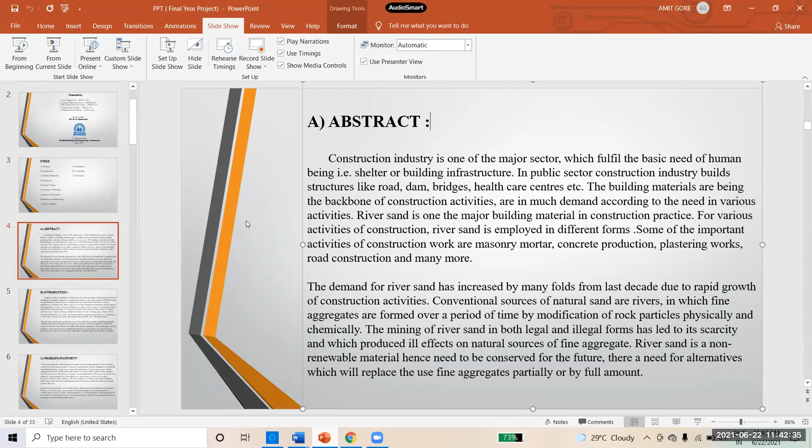Sir, where am I last?

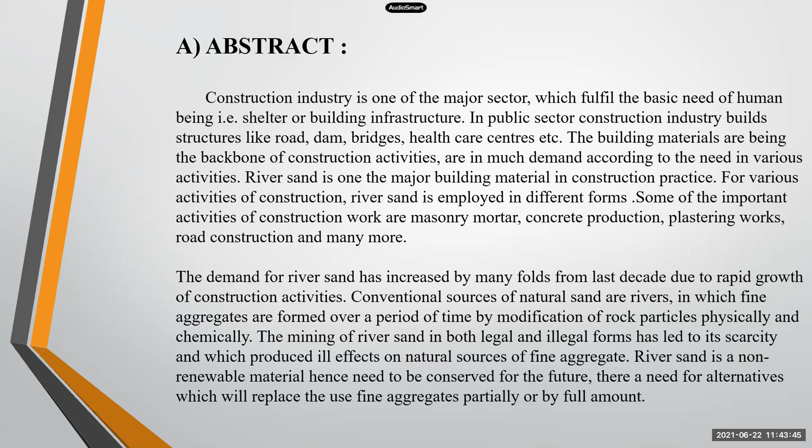Excessive in-stream sand and gravel mining causes the degradation of river. In-stream mining lowers the stream bottom, which may lead to bank erosion. The effect of mining is compounded by the effect of sea level rise. Hence, we need to have alternative options for river sand.

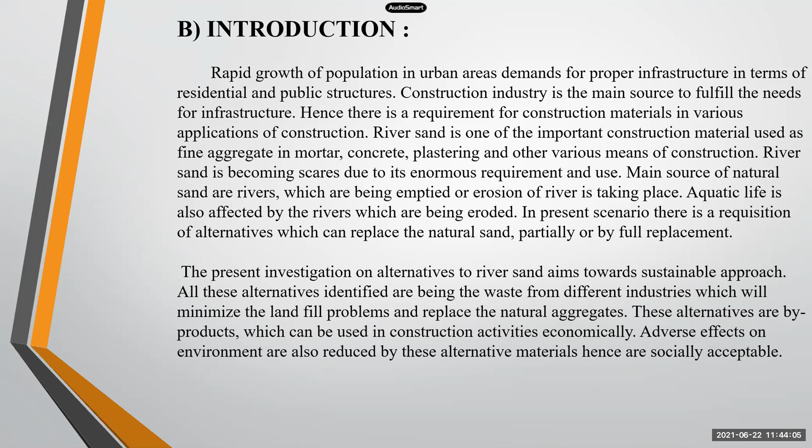Also, we have to keep in mind that alternative options should achieve high strength, gain greater workability, avoid construction defects, and reduce economy of construction.

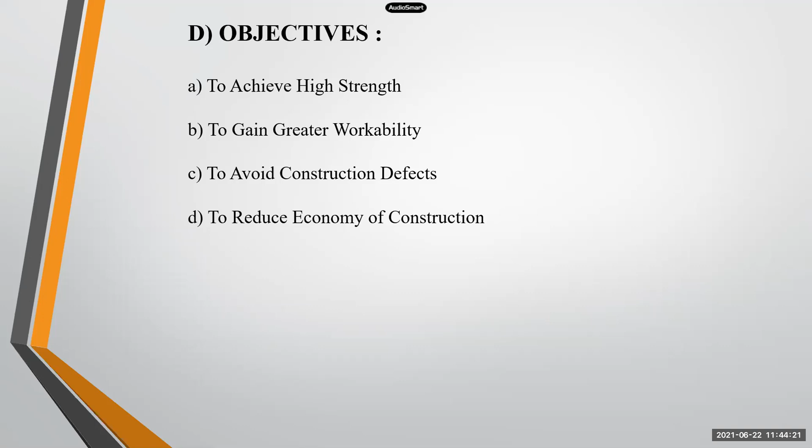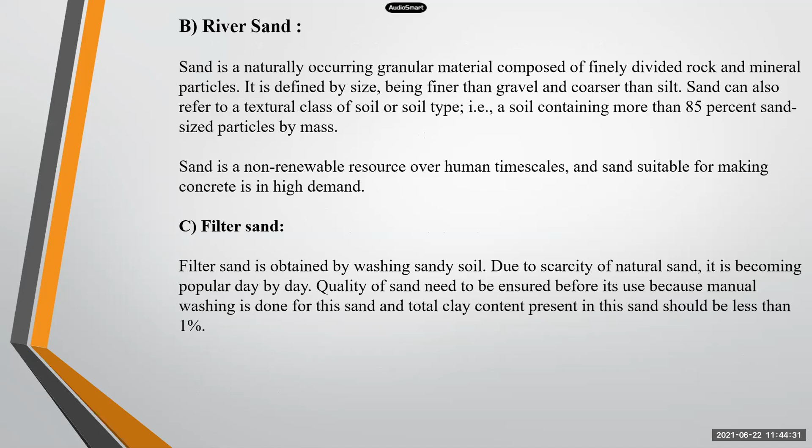There are many alternatives to the river sand like manufactured sand, filter sand, dune sand, offshore sand, and slag sand.

Also, there are some tests to know whether an alternative sand is effective or not. There are some tests like flow table test, compressive strength test, tensile strength test, flexural strength test, etc.

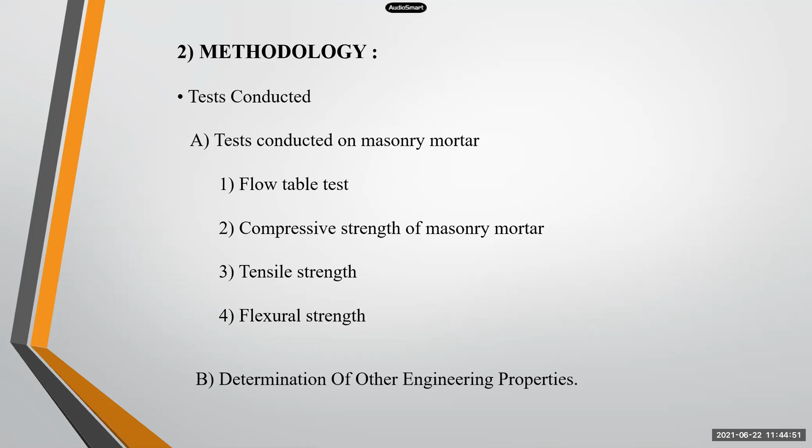The advantages of alternative sands are like it does not have the impurities such as clay, dust, silt, coatings, and increased water requirement of river sand due to impaired bond between cement paste and aggregate.

So in conclusion, based on the experimental investigation on the alternative sands, the alternative sand can achieve greater strength and properties and it can be the best replacement to river sand.

Now Satyajit Guru will continue in depth, he will explain. Yes, myself Satyajit Guru, I will explain the scope of the study.

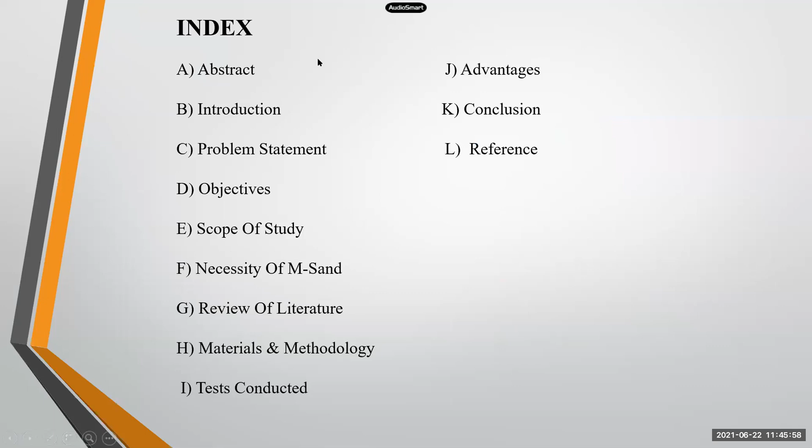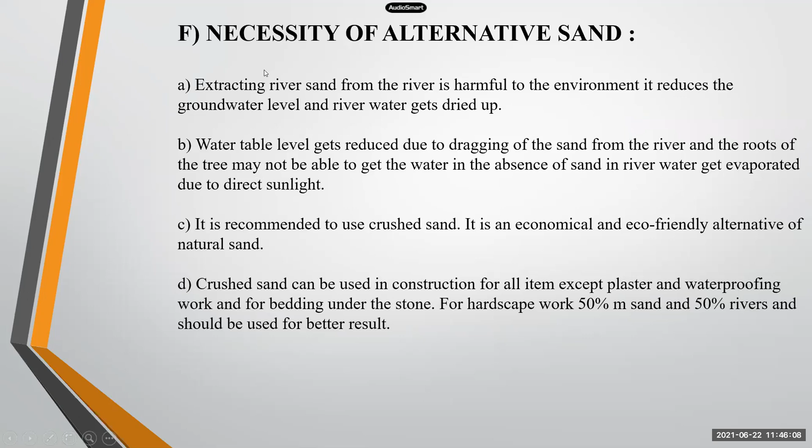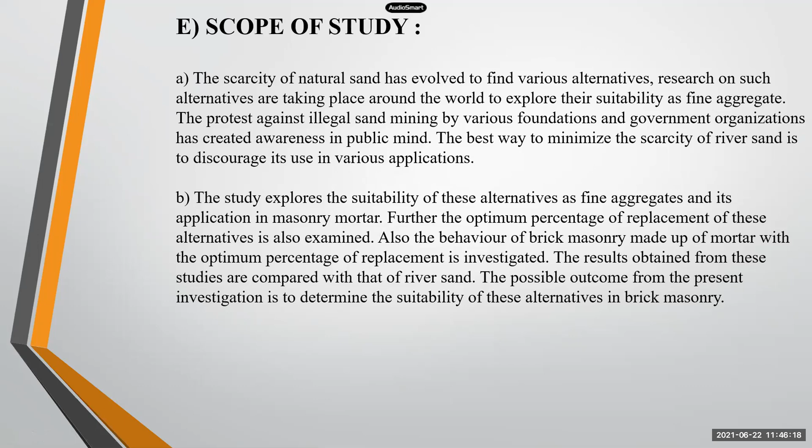Scope of the study in which we will basically focus on what is the alternate sand for river sand. First one is the scarcity of natural sand, which led to finding various alternatives. Research on these alternatives is taking place around the world to explore their suitability as fine aggregate, in protest against illegal mining.

Various foundations and government organizations have created awareness in public mind, and the best way to minimize the scarcity of river sand is to discourage its use in various applications.

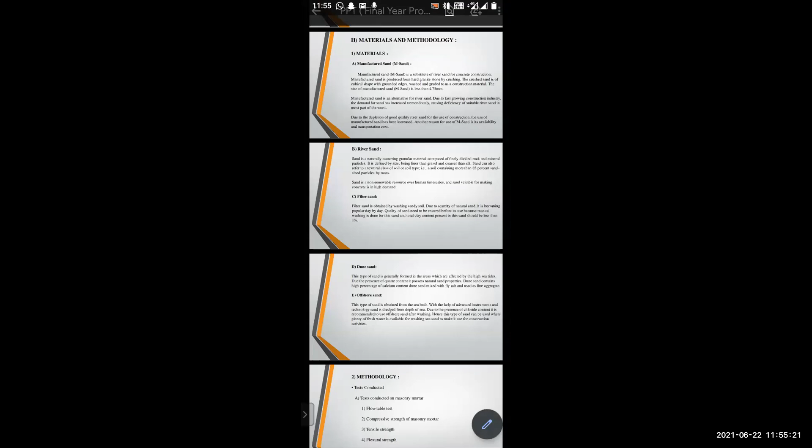River sand. This sand occurs from finely divided rock particles. It is defined as size being finer than gravel and coarser than silt. It contains more than 85% sand-size particles by mass.

Filter sand is obtained by washing sandy soil. Due to scarcity of natural sand, it is becoming popular day by day. Quality of sand needs to be ensured before use because of manual washing of sand, and total clay content present in the sand should be less than 1%.

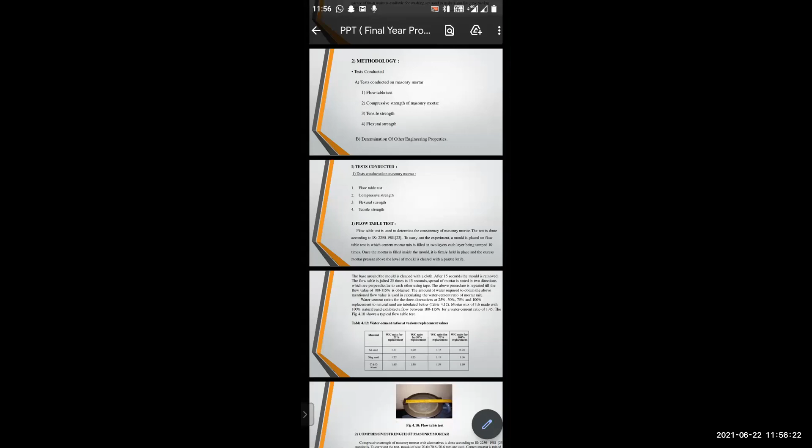Now Santosh Dole will explain the test and methodology. Good morning to all of you. I am Santosh. As per Indian standard, conduct the test on masonry mortar.

How can we conduct this test? There are 4 methods or tests. First one is a flow table test. Second one is compressive strength. Third one is flexural strength. Fourth one is tensile strength.

The first test we conducted is the flow table test. It is used to determine the consistency of masonry mortar, as per Indian standard 2250-1981. How can we conduct the test?

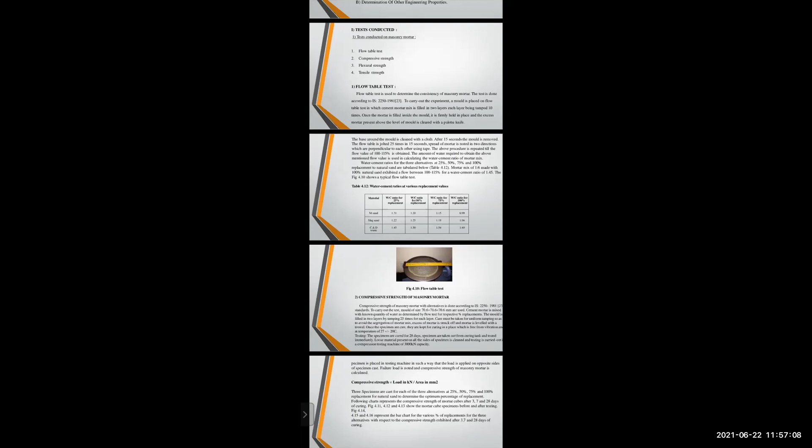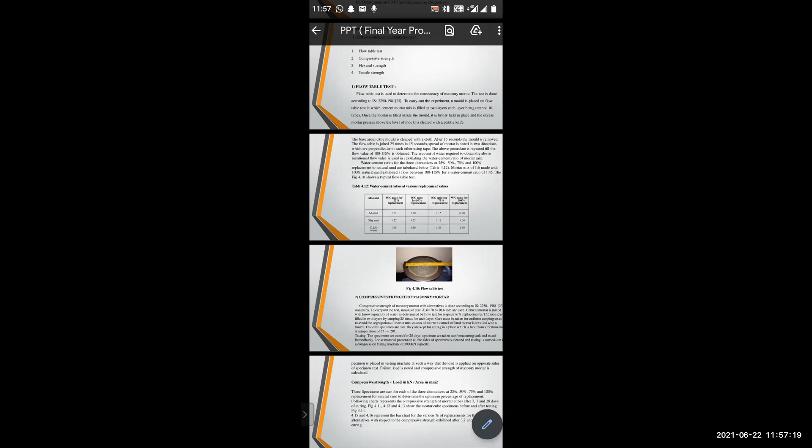The mold is first placed on a flow table, in which cement mortar is filled in 2 layers, each layer tamped 10 times. Excess mortar above the mold is cleared with a palette knife. Then, using a cloth, clean the mold. After 15 seconds, remove the mold.

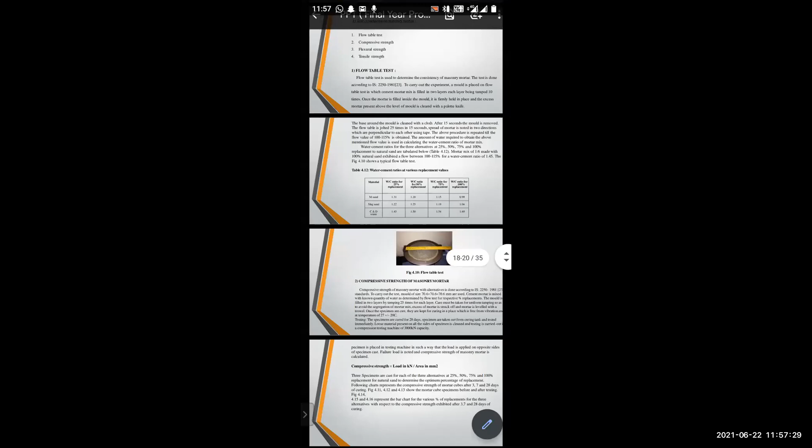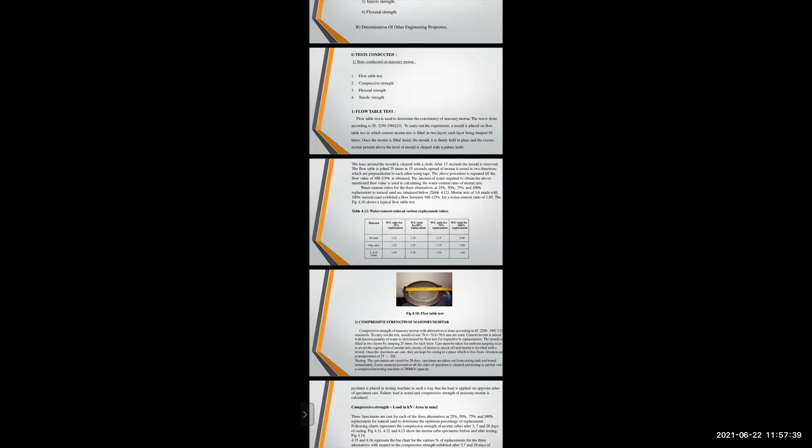The flow table is jolted 25 times in 15 seconds. Spread mortar is noted in two directions, which are perpendicular to each other. The above procedure is repeated until a flow value of 100 to 115% is obtained.

The obtained flow value is used for calculating the water cement ratio of the mortar mix. The second test is compressive strength.

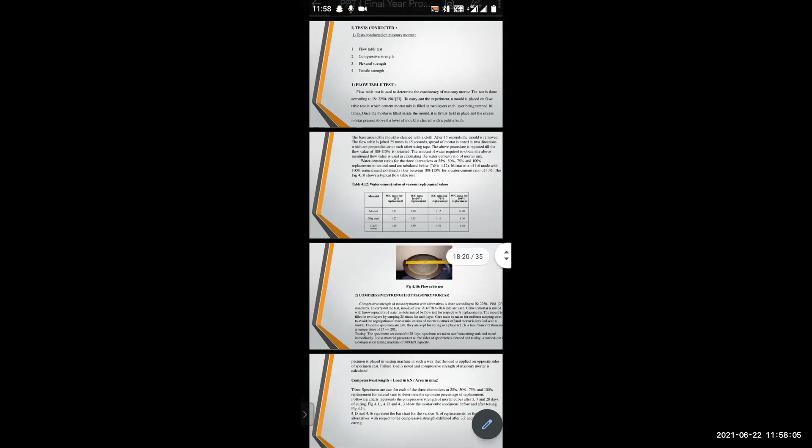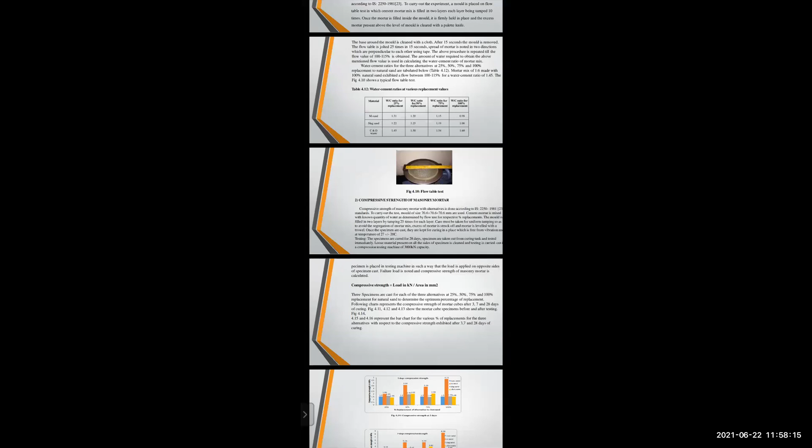As per the India Standard Code 2250-1981-23, standardly carried out, the test mold size used is 70.6 by 70.6 by 70.6 mm. Cement mortar is mixed with known quantity of water from the flow test for the respective replacement. The mold is filled in 2 layers, tamping 25 times for each layer.

Care must be taken for uniform tamping to avoid segregation of the mortar mix. After striking off, the mortar is leveled with a trowel. Once the specimen is cast, it is kept for curing in a place free from vibration, at a temperature of 27 degrees.

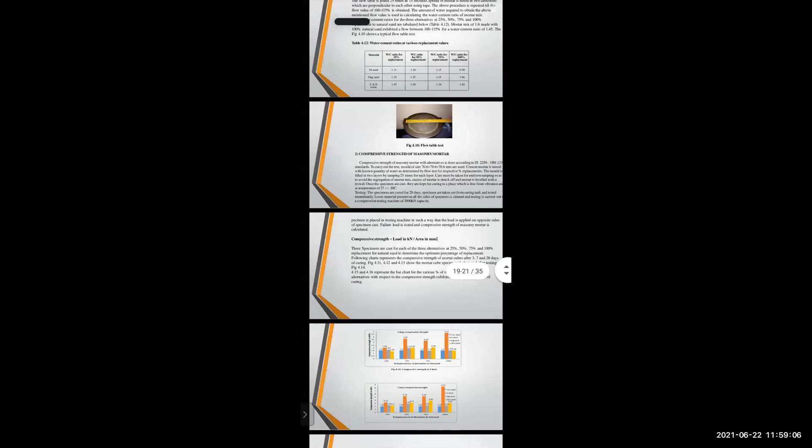The specimen is cured for 28 days, then taken out from the curing tank and tested immediately. All loose material on the sides of the specimen is removed, and the test is carried out on a compressive strength machine of 3000 kilonewton capacity.

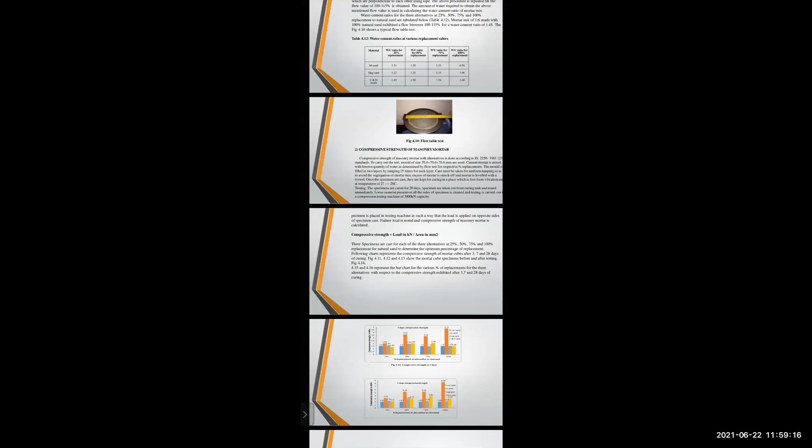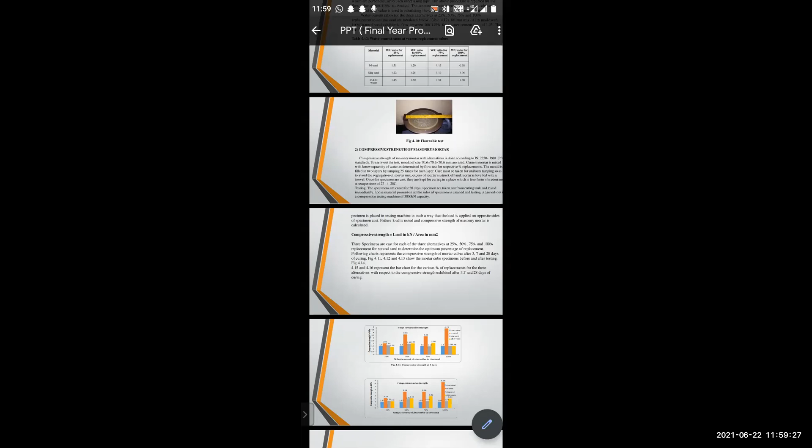The specimen is placed in the test machine such that the load is applied on the opposite side of the specimen cast. The failure load is noted, then the compressive strength of the masonry mortar is calculated, using the formula: compressive strength equals load divided by area.

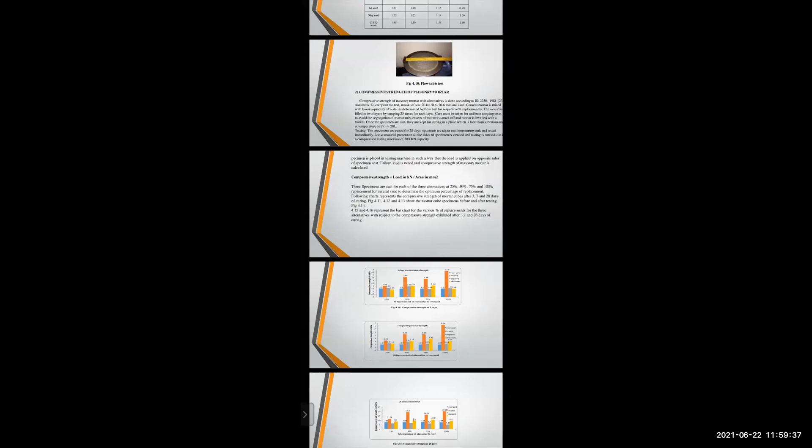After the third test, as per Indian standard, that's tensile strength. Tensile strength of a mortar made with alternative materials is determined using a briquette, as per ASTM C307-24. A lever arm test apparatus is used for loading the briquette specimen, with a lever arm ratio of 40.

Lead shot is used to balance the lever arm, which is placed inside a measuring jar. Once the briquette specimen is firmly placed, shot is released from the top, and the amount of lead shot collected in the measuring jar is weighed. Tensile strength is then calculated using the formula P into LA divided by area.

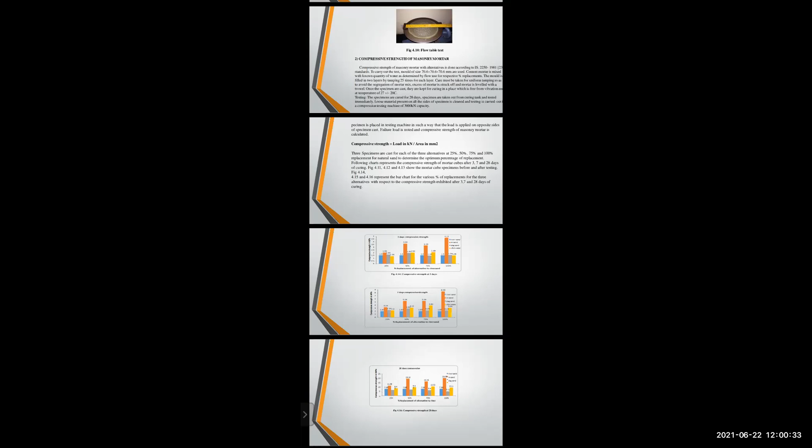P is the ultimate strength and LA is the lever arm ratio, which we have taken as 40.

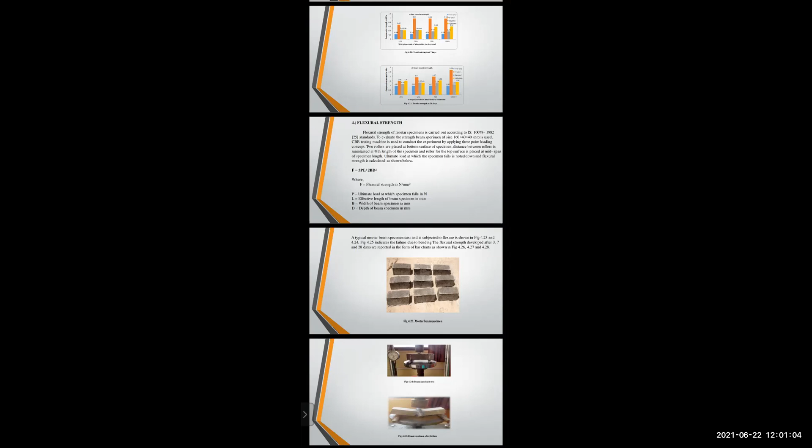The last test conducted as per Indian Standard is the flexural strength test, carried out as per Indian Standard 10078/1982-25 to evaluate the strength of the beam. The specimen size is 160 x 40 x 40 mm, tested using a CBR testing machine by applying the 3-point load concept. Two rollers are placed at the bottom surface of the specimen.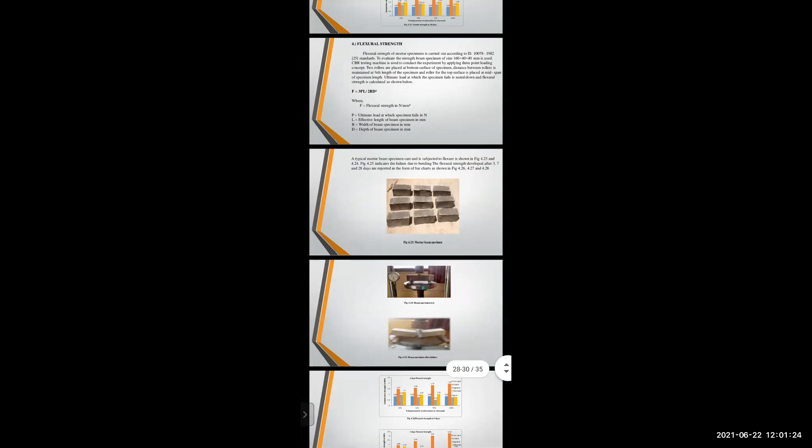The distance between the two rollers is 3/4 of the length of the specimen. A roller for the top surface is placed at mid-span of the specimen length. The ultimate load at which the specimen fails is noted down, and then the flexural strength is calculated using the formula F equals 3PL divided by 2BD square.

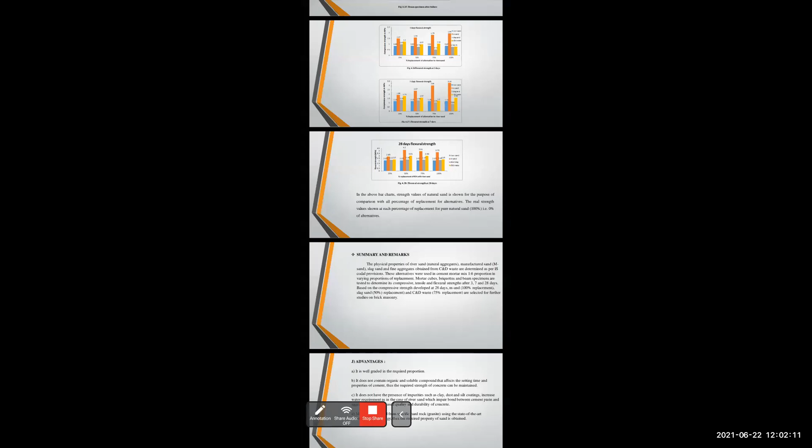Manufacturing sand is obtained from specific hard rock using state of the art international technology, and the properties of the sand are obtained accordingly.

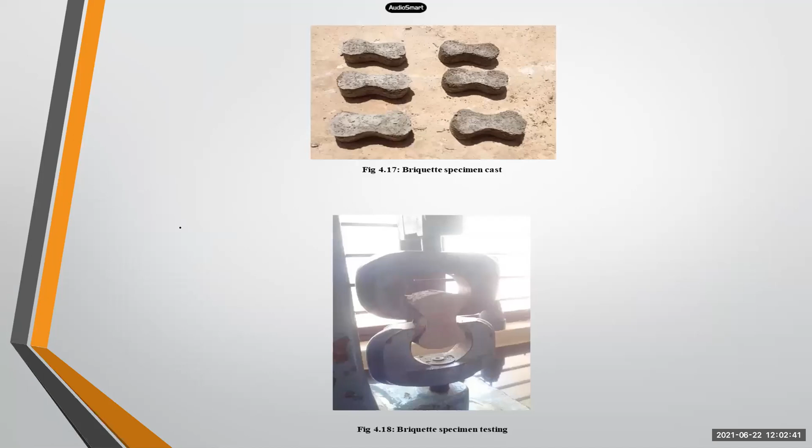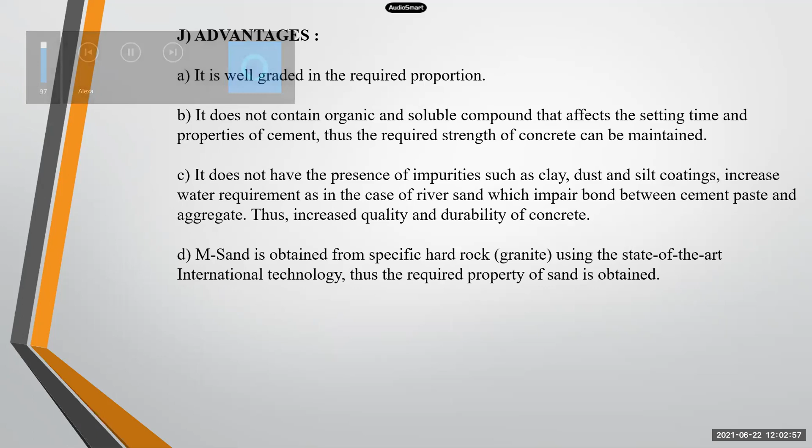Conclusion. Based on the experimental investigation carried out on the three alternatives, namely M-sand (manufactured aggregate from a manufacturing plant), slag sand (an industrial by-product from a steel plant), and C&D waste (recycled fine aggregate), the following conclusions can be drawn.

First, sieve analysis on all three alternatives has shown that they can be categorized under zone 2 sand as per Indian Standard codal provisions. Second, the specific gravity of all three alternatives is lower than natural sand, which is also reported in the literature review.

Water absorption exhibited by M-sand and slag sand is around 2%. C&D waste has shown 6%, similar to past research findings. This is due to the presence of adhered mortar around the particles.

The loose and rodded densities of slag sand and C&D waste are lower, while M-sand has shown a higher value compared to the density of natural sand. Bulking properties, a measure of water absorbing capacity of sand particles, are comparable with natural aggregate. However, M-sand has shown 63% bulking.

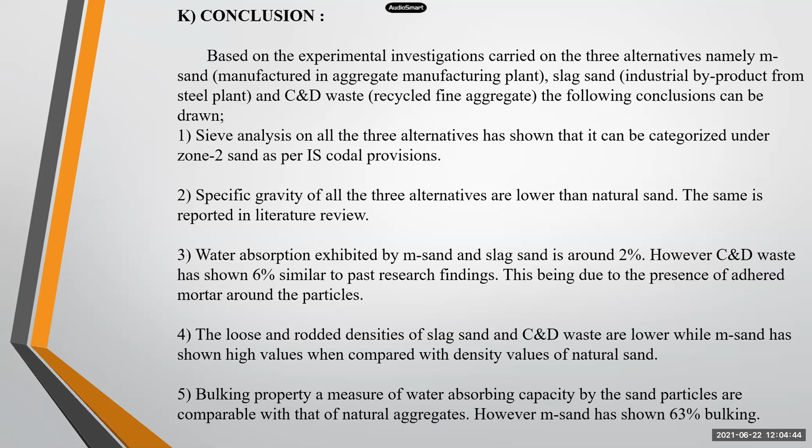References: Indian Standard 1905, 1987, Indian Standard Code of Practice for Structural Use of Unreinforced Masonry, Bureau of Indian Standards, New Delhi. Second, B.V. Venkataram Reddy, Suitability of Manufactured Sand (M-sand) as Fine Aggregate in Mortar and Concrete, CSIC project sponsored by Department of Mines and Geology, Government of Karnataka, July 2011.

Third, H.M.A. Mahzuz, A.A.M. Ahmed and M.A. Yusuf, Use of Stone Powder in Concrete and Mortar as an Alternative of Sand, African Journal of Environmental Science and Technology, Volume 5, May 2011, pp 381 to 388.

Fourth, Priyanka A. Jadhav, Dilip K. Kulkarni, Effect of Replacement of Natural Sand by Manufactured Sand on the Properties of Cement Mortar, International Journal of Civil and Structural Engineering, Volume 3, Number 3, 2013.

Last, Leonardo F.R. Miranda, Camila S. Constantino, Carla R. Monich, and Antonio A. de M. Neto, Use of Recycled Sand Produced at Construction Sites in Bedding Mortar, American Society of Civil Engineers Library, 2013.

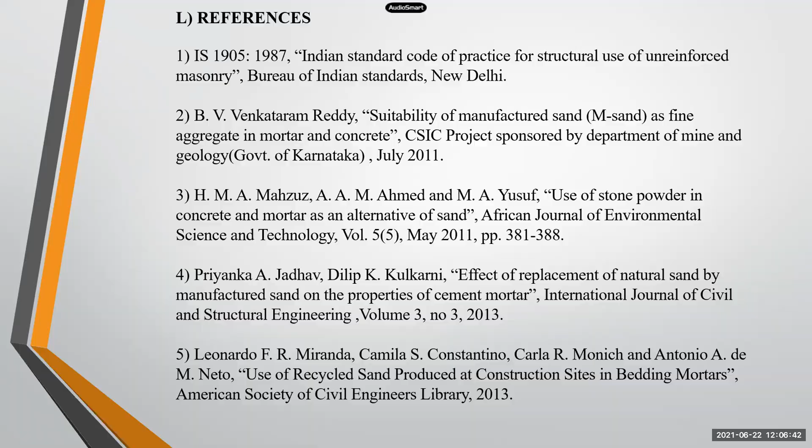We are also going to publish a research paper on manufactured sand. This is our paper, which we are going to present on 24th and 25th June.

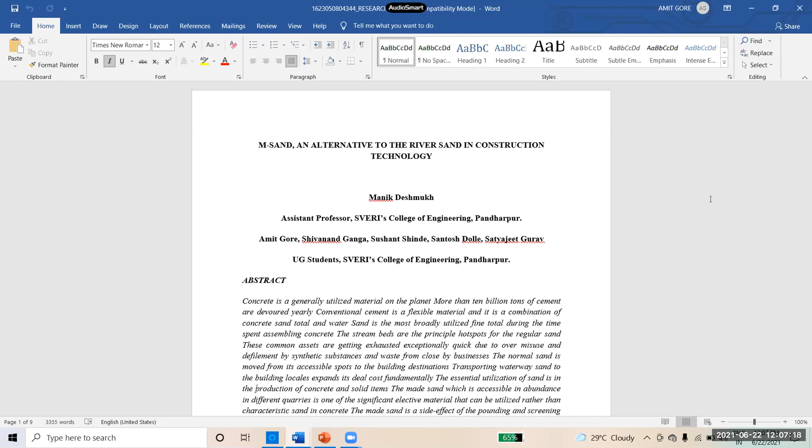Out of various alternative sands, M-sand has shown higher strength and workability as compared to other sands.

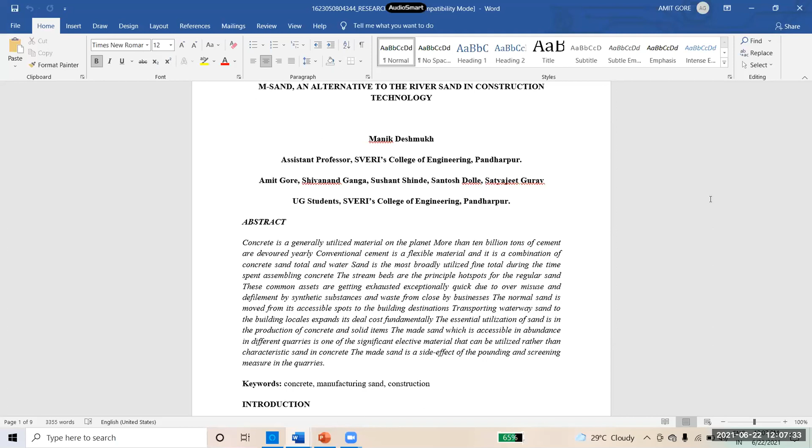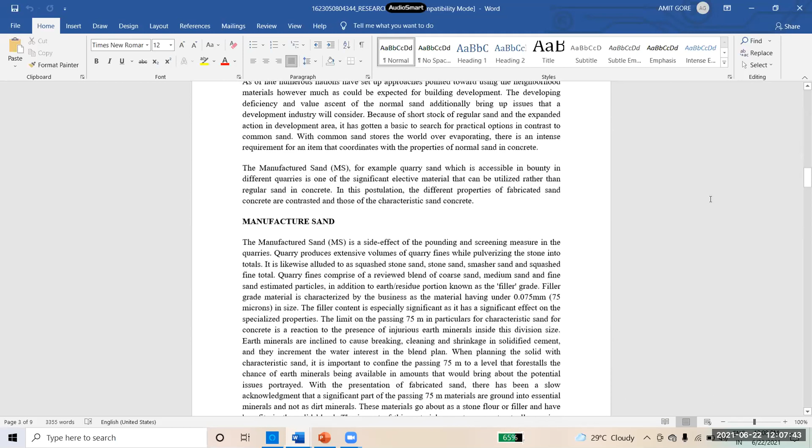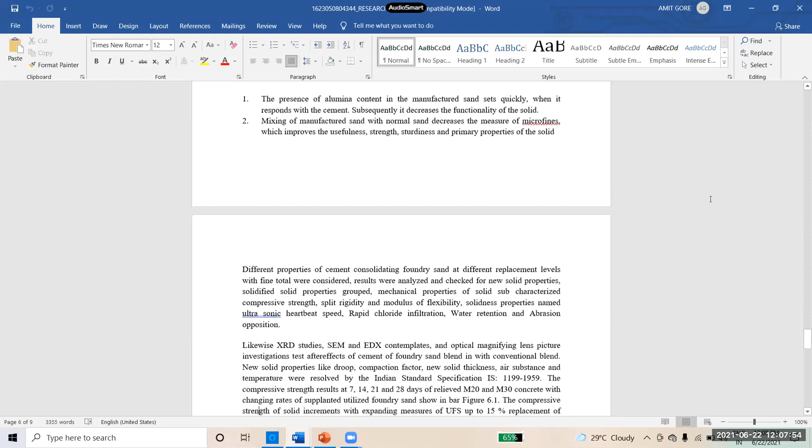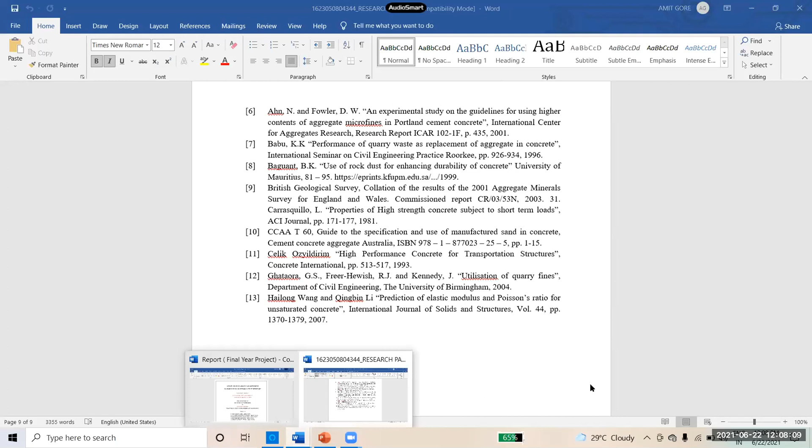Show us the published copy. Is this just a rough copy, or has it actually been published? We are going to present and publish it at the international conference on the 24th. We have received acceptance for the conference, sir, and we will be presenting on the 24th.

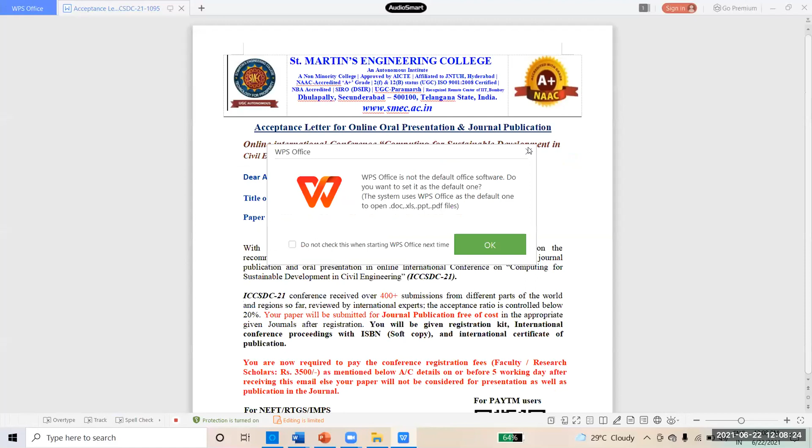So in this presentation, why did you stop the screen sharing? There are 2-3 points, corrections you should make.

First and most important thing is that in the presentation you have put paragraphs. Paragraphs should not be there in the presentation, only pointers should be there. You should put paragraphs only when it is very necessary. Entire PPT should be changed. You have just copied things from the thesis. Whatever the main points are, only those things you add and explain.

The second thing is your study is very less. I think you are just reading the things. If I ask you to read any paragraph and tell us the meaning of it, nobody from you will 100% tell us the meaning. So your study, you have not done properly. You are just reading it, and while reading, it reflects to the person judging you that you have not done sufficient homework about your project.

The third thing is you have included bar charts, graphs, but you have not explained those graphs. What is on the x-axis, what is on the y-axis, which bar represents which thing - that is not explained. If you don't want to explain it, then why have you put that in your presentation?